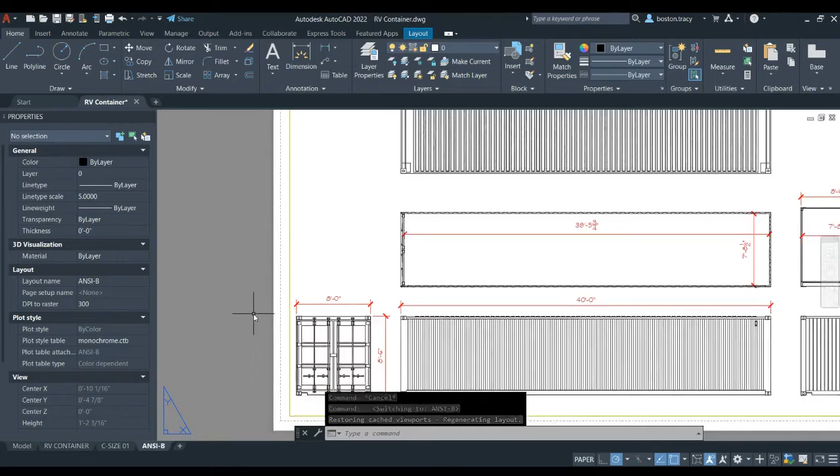However, this time I'm showing you something I did about 3.5 to 4 years ago, when I was still in classes at school for drafting. We were given a project where we had to take a regular steel shipping container and make a product to sell out of it. We could use no more than five separate shipping containers for our product, and no less than one full container. So we had to use at least one.

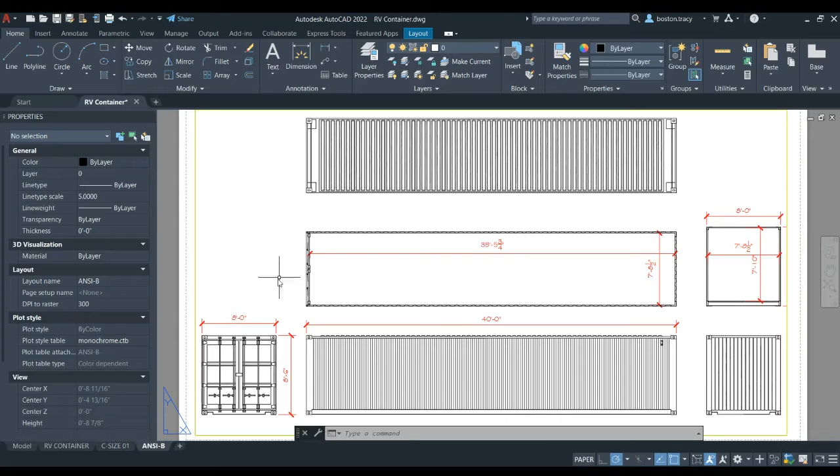And because of their sizes, what I decided to do is make my own Class B motorhome. I found that some Class B motorhomes have a gasoline engine, others have a Freightliner engine, but primarily they had a gasoline engine. However, because my motorhome is made of steel, it's going to be really, really heavy, and it's going to need that Freightliner diesel to get it going and to have a decent miles per gallon ratio.

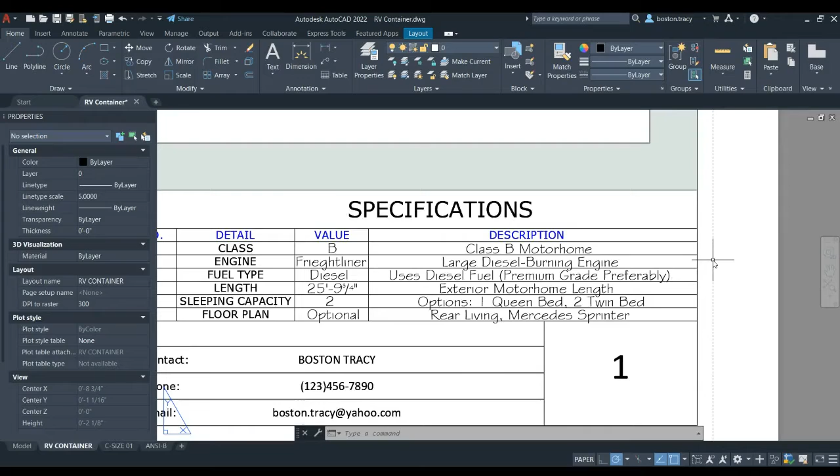Gasoline would struggle to get it moving at all, and you would drop all of your money in gas just to go down the street. But anyway, what I decided to do was make mine a Class B motorhome, because steel shipping containers are roughly about the same size as Class B RVs.

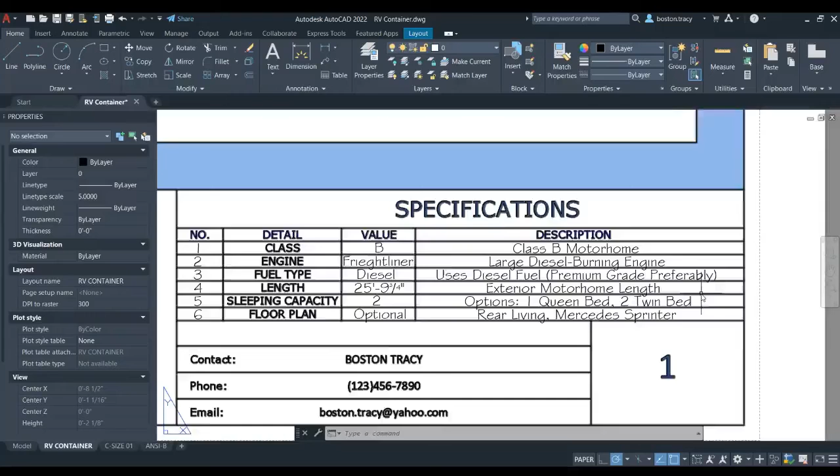Okay, the length is 25 feet, 9 3/4 inches, and I decided to give it some options. The sleeping capacity is two, so you could either have one queen size bed for couples, or you could have two twin beds, and that could be for couples or friends, you name it.

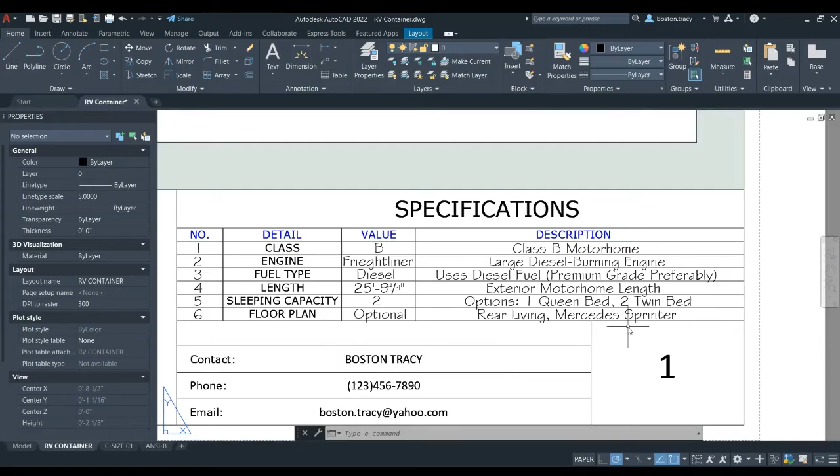As for my floor plan, I had looked at several floor plans and decided to make it optional, where you could have a rear living floor plan or a Mercedes Sprinter floor plan. Now, unfortunately, because I did this so long ago, I deleted the interior. I had made a plan view of this with the interior, so that you could see through and see the interior, and it was almost an exact copy of a Mercedes Sprinter.

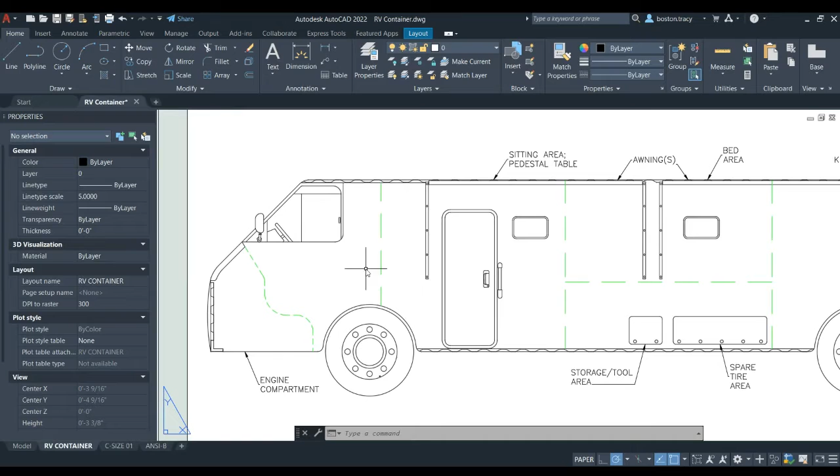But let me walk you through what I did for the shipping container, how I made it into a good mobile RV. So I cut this top corner off of it, so you could put in the windshield and windows and stuff. I wanted to leave this lower corner for the engine area, and of course the driver will sit here, and there will be a kind of wall here, which is just the driver's area up here.

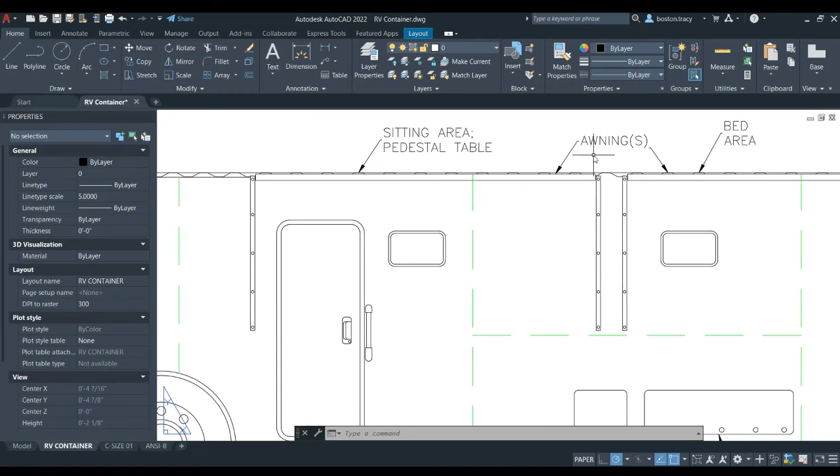And now you see these two tall, hole-y stick looking things here, and on this side. Those hold and bolt on the awning, because this is going to have two awnings, a small one and a very, very long one. The awnings will come out in case, let's say, you brought a grill with you, or there's a grill where you pull up your motorhome, and you're cooking out, and it's hot and sunny, or maybe not that hot, but just sunny. So you want a nice awning for some shade.

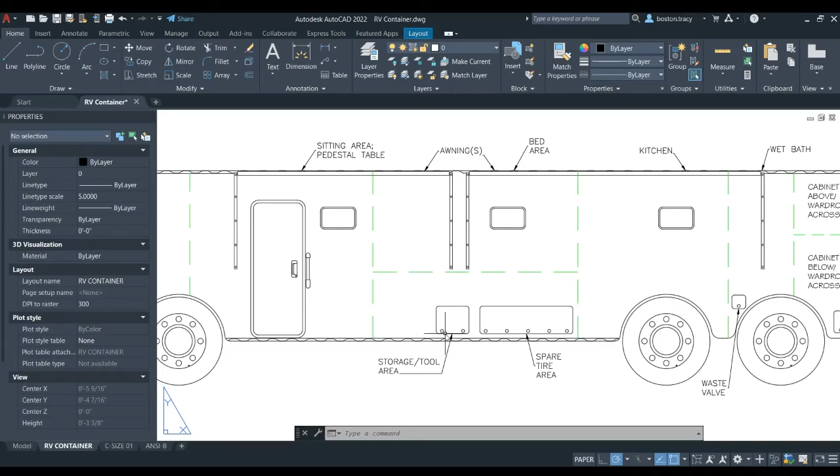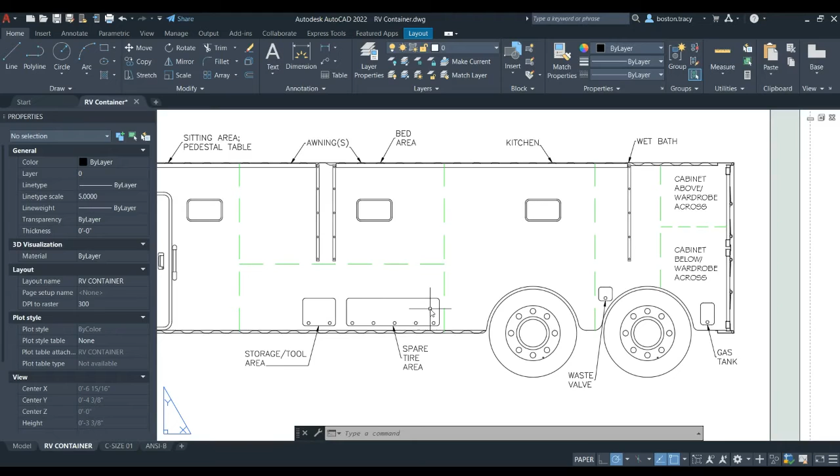This here is about where the bed will be, and this is just your open area. And this will be your storage, your tool area for your tools, say to put your spare tire on. You would keep a jack in there, wrench, socket set, etc. And this, of course, is where your spare tire is stored, just in case you have to put one in.

And in here is the kitchen area. I decided it would have a stove, a microwave, a pantry, and I don't think I put an oven in there because it's a Class B motorhome. But I did decide to give it a wet bath, so you would have a toilet on one side and a shower on the other side, and a sink maybe in between or near the toilet, very close to it.

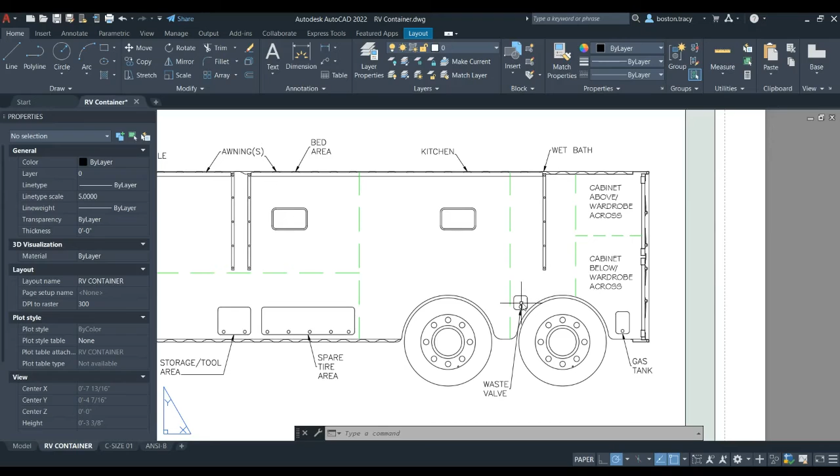And this is your waste valve, so that when you're emptying the tank, you would have your waste valve here to empty it. And of course, here's your gas tank, and here I decided to make wardrobes, where you have your cabinet above and wardrobe across on top, and your cabinet below and wardrobe across on bottom. So you have a wardrobe all the way across with cabinets above and below, or a wardrobe on one side and cabinets above and below on the other side.

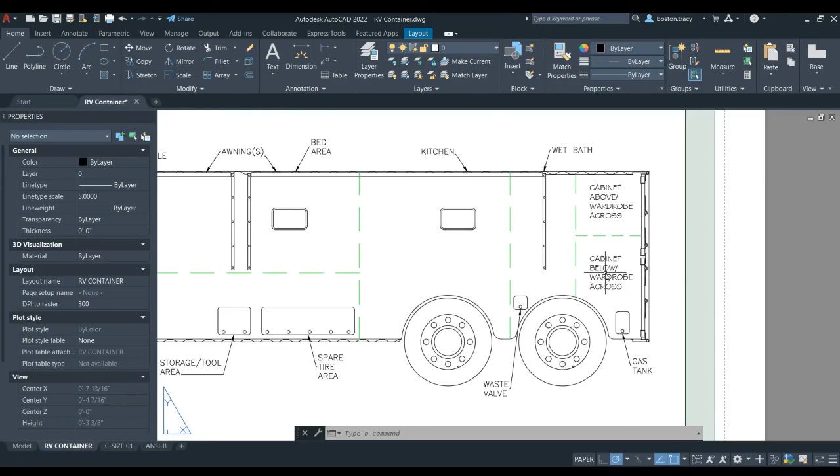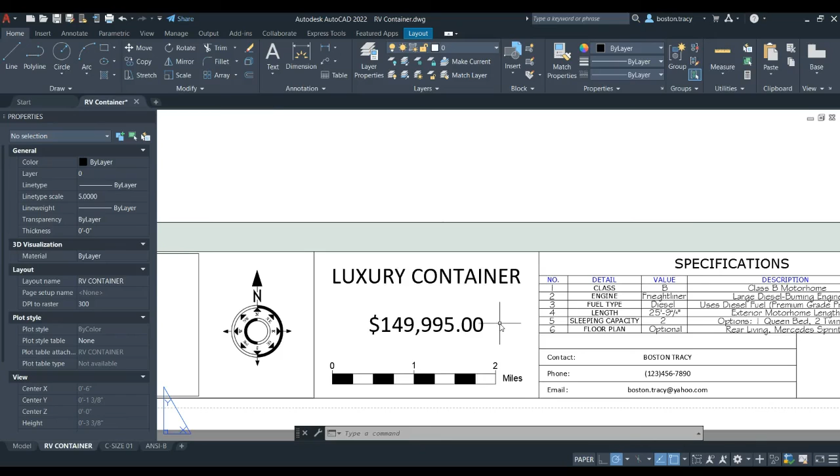And I am sorry that I no longer have the interior view, but I did make this a little cheaper. I can't remember, but I want to say a Class B motorhome is usually around 175,000 to 200,000 if I remember right, for the size at least. There's cheaper ones, but they are a whole lot smaller. I do remember finding a couple cheaper motorhomes, but they looked maybe half or three quarters this length, so they didn't have nearly the interior that mine does. But I am very proud of it, and I wish I could find the Mercedes Sprinter interior that I drew, but unfortunately, I do think I deleted it.